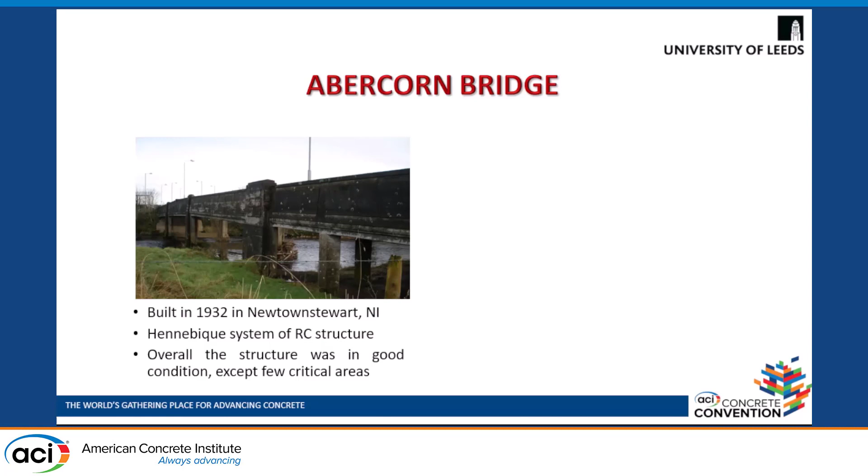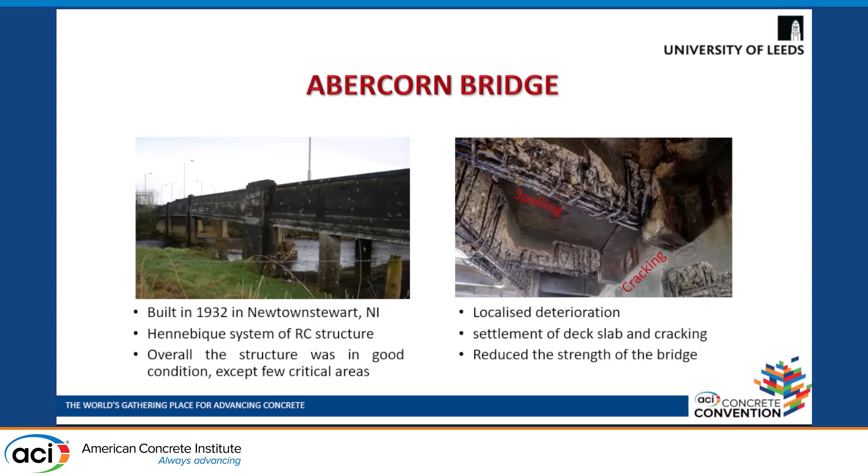A brief overview about the bridge: it was built in 1932 in Northern Ireland using a Hennebique system for reinforced concrete structure. Overall, the structure was in good condition. However, with time, the concrete started showing localized deterioration such as spalling and cracking while exposing the reinforcement steel. In addition, there was settlement of the deck slab and cracking seen across the entire span of the expansion joint, leading to a reduction in the strength of the bridge.

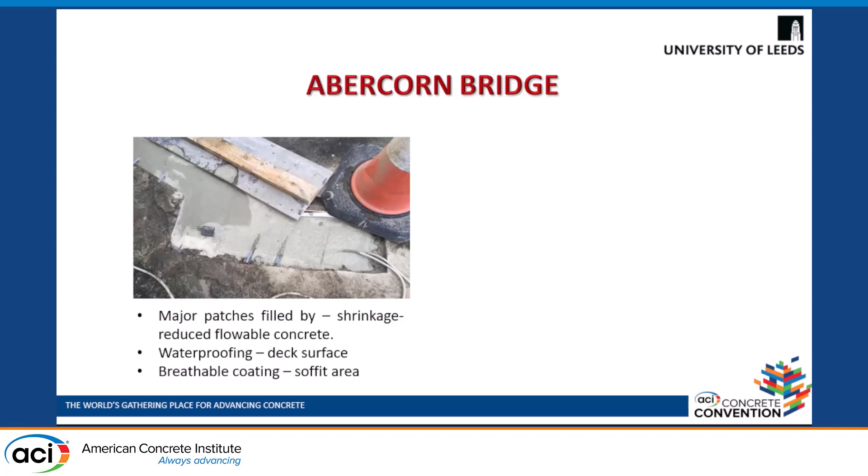Therefore, this bridge was repaired and the major patches were filled with shrinkage-reduced flowable concrete. There was a waterproofing layer over the deck surface, while on all the exposed surfaces there was a water vapor transmissible membrane, which is a breathable coating layer to allow the water moisture to evaporate.

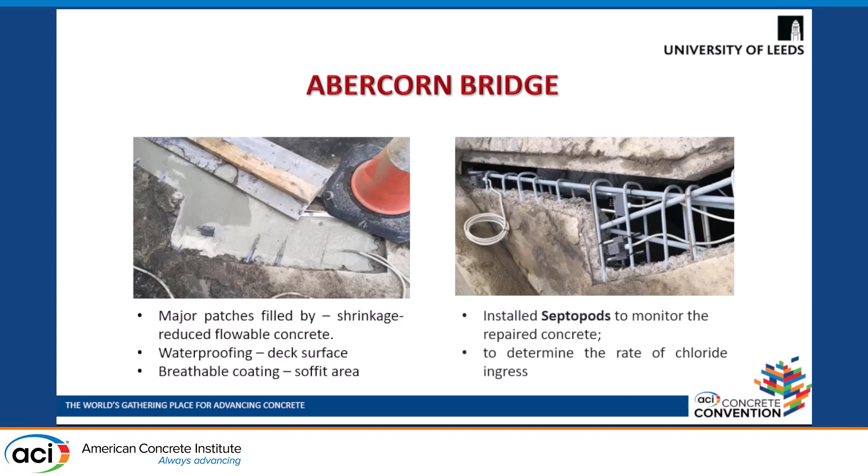During the repairs, 3 Septopods were installed to monitor the repaired concrete and to check whether this repaired concrete is working well or not, and to determine the rate of change of chloride ingress.

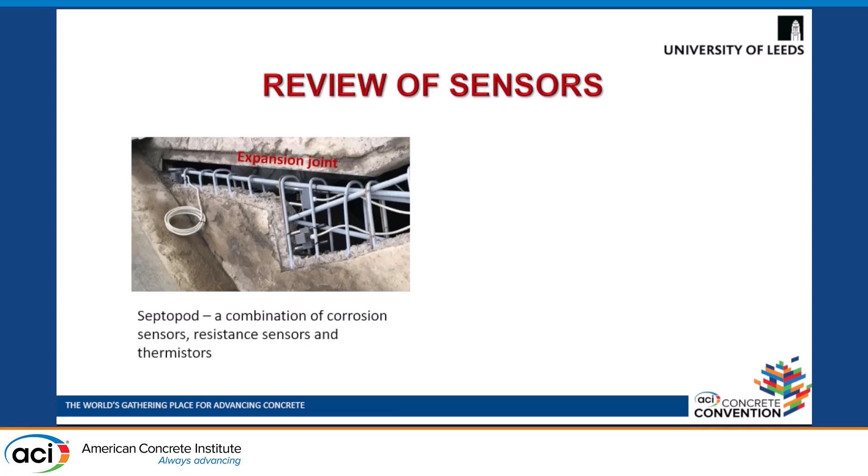So, a review of the sensors: this is the expansion joint where the 3 sensors are installed. These 3 sensors are a combination of corrosion sensors, electrical resistance sensors, and thermistors.

Sensor 1 is located at 20 mm from the deck surface near the expansion joint, while sensor 3, which I'll be discussing here, is located at 20 mm from the soffit area near the expansion joint. Sensor 2 I won't be discussing in this presentation, just these 2 sensors.

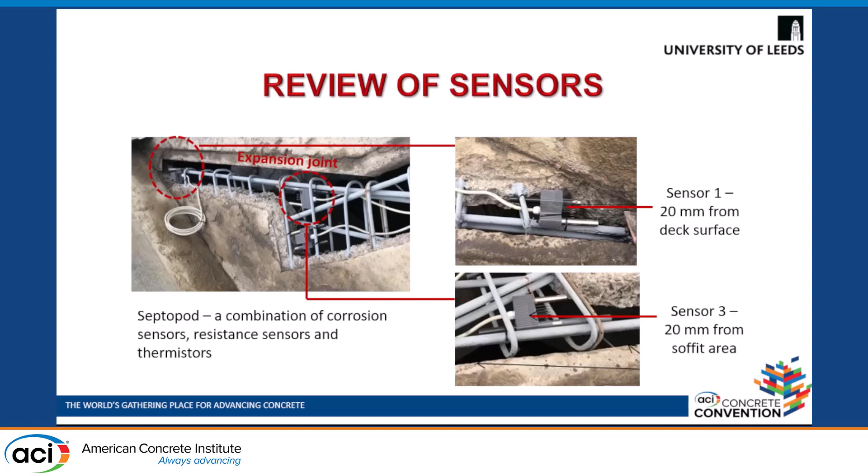These 2 sensors are oriented in such a way as to capture the changes in electrical resistivity and temperature near the deck surface and the soffit of the bridge. The data was recorded over 4 years: every 2 hours for the first 20 months, and thereafter twice a day for the remaining period.

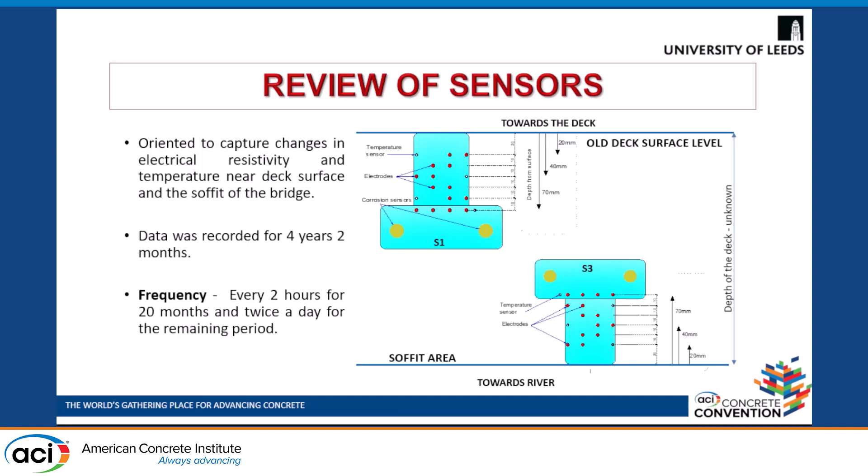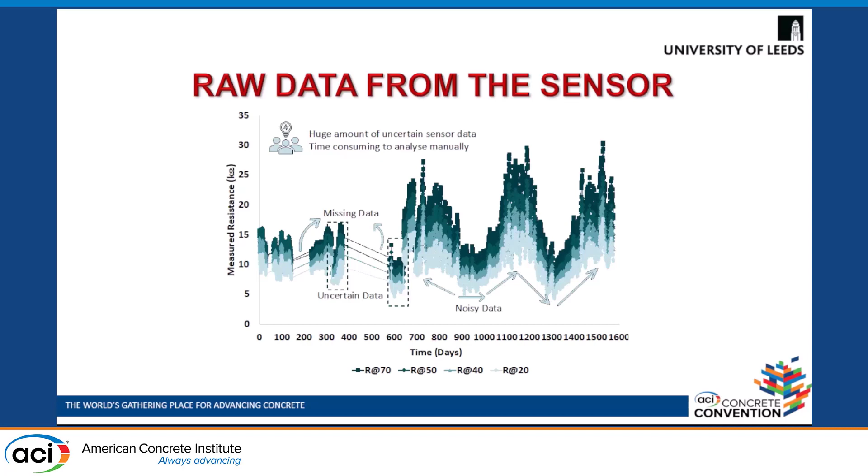With the amount of monitoring being done, the data collected is also accelerating, making it difficult to analyze and manage this huge amount of uncertain sensor data, and it is time consuming as well. Therefore, an automated AI-based SHM methodology has been developed and applied to the data obtained from electrical resistance sensors, to calculate the diffusion coefficient to assess the performance of repaired concrete.

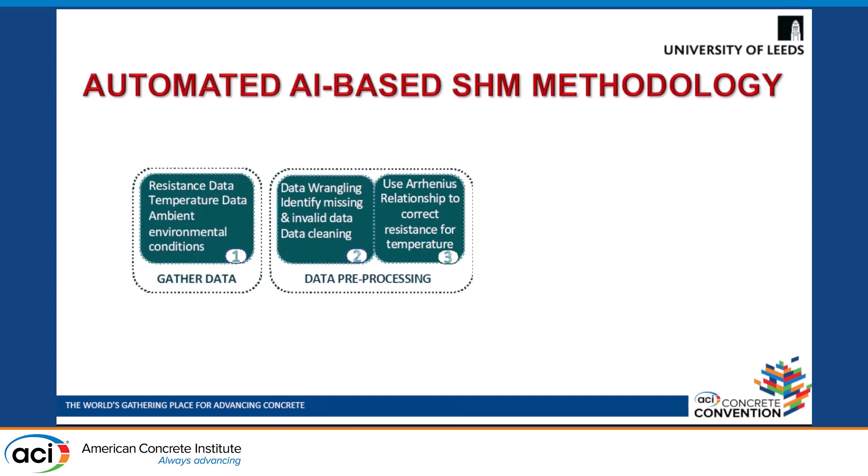This methodology is a 5-step process. In the first step, you gather the data from resistance data, temperature data, and all the ambient environmental conditions data. It is then pre-processed, where you identify the missing information and invalid data, clean it, and use an Arrhenius relationship to correct the resistance for temperature, to understand the effect of temperature and ambient conditions on the resistance measurements.

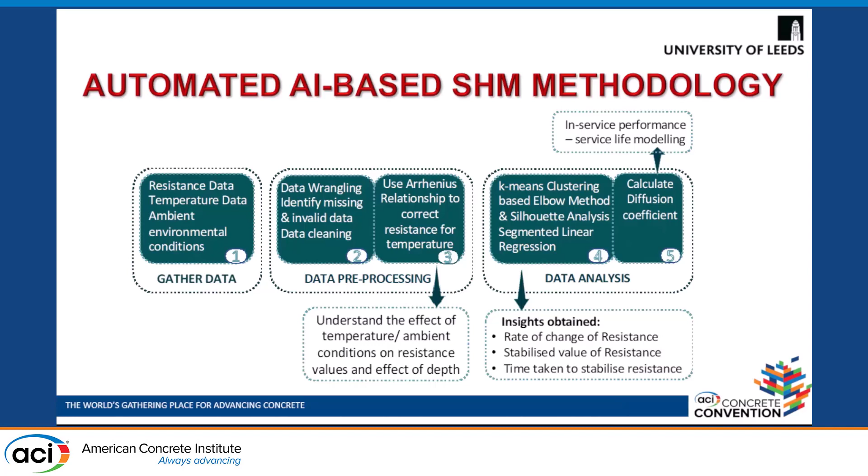Once the data is pre-processed, you use a k-means clustering-based segmented regression, which provides insights on the rate of change of resistance, the stabilized resistance value, and the time taken to stabilize the resistance. This can then be used to calculate diffusion coefficient values, which can in turn be used in service life modeling for in-service performance.

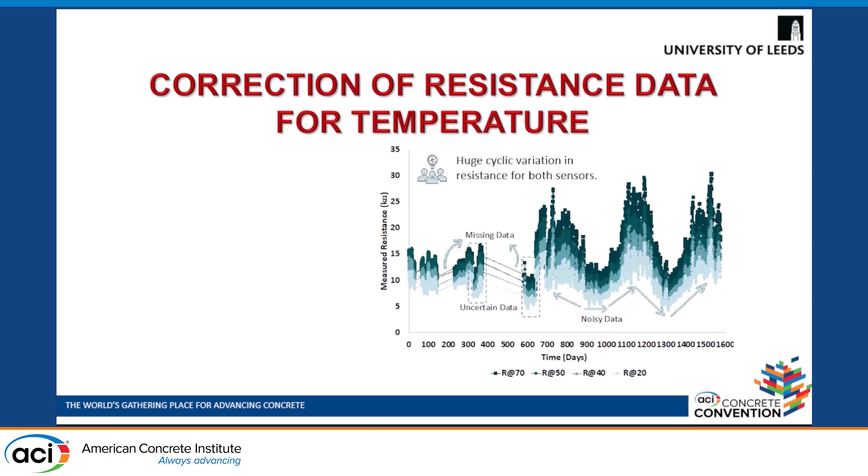As you can see in this raw data, there were huge cyclic variations in resistance for both sensors, mainly because the resistance is affected by temperature measurements. With the increase in temperature, there was a decrease in the resistance. Therefore, this Arrhenius relationship is used to reduce the influence of temperature and standardize the measurements to 25 degrees Celsius.

So these huge variations which were seen earlier... sorry, this is not moving.

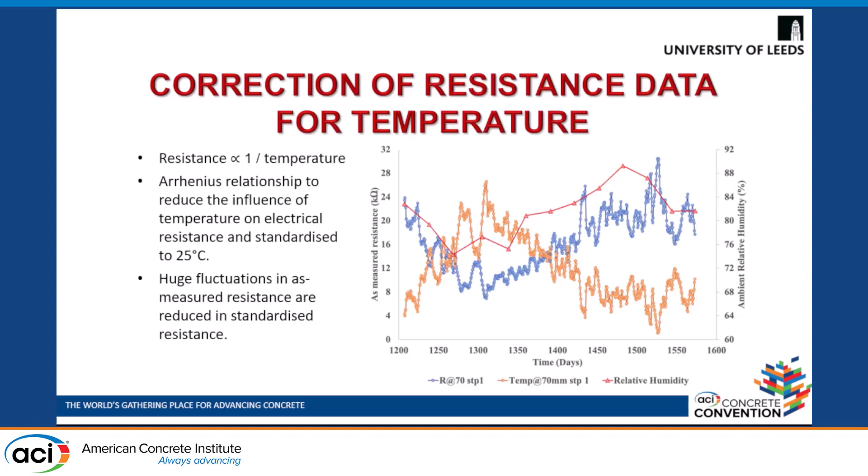The huge variations which were seen earlier are now reduced, and we can see that there is some missing information in the data. Overall, the resistance is increasing with time. However,

there is a drop in resistance around the end of year 1, after the repairs. This was because there was a leak in the repairs. So once these repairs were done again, the resistance started to increase. However, there was

another increase in the resistance, which was around 600 to 700 days in between. This was because there was a change in the frequency of data being captured, and secondly, the nearby areas of the bridge were heated up to get rid of the moisture inside. So that led to an increase in the resistance.

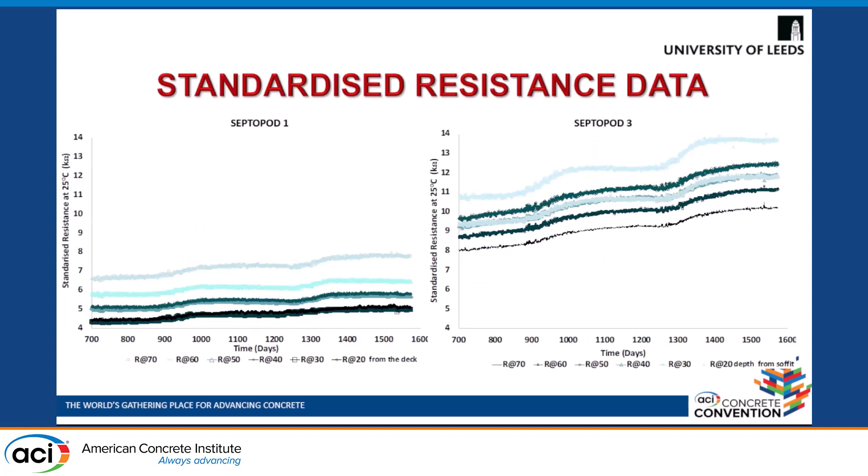However, after 700 days, there was a continuous increase in the resistance. So for further analysis, we are using the data after 700 days.

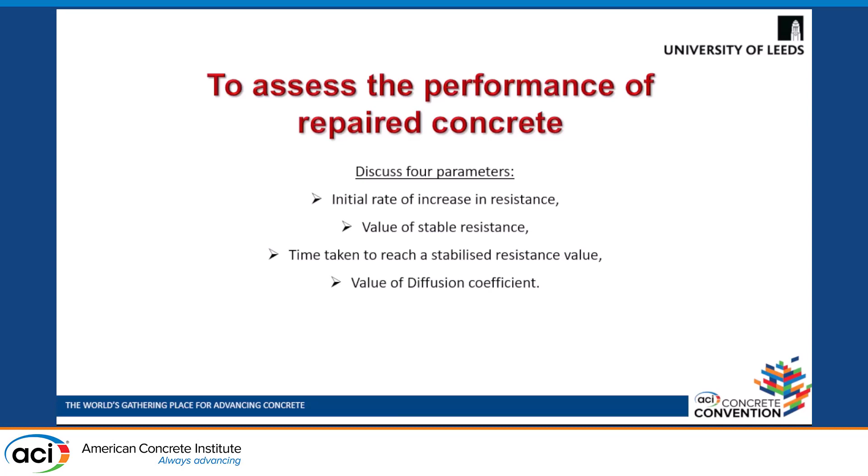So to assess the performance of repaired concrete, it is essential to discuss 4 parameters: initial rate of increase in resistance, value of stabilized resistance, time taken to reach a stabilized resistance value, and value of diffusion coefficient, for which we are using clustering-based segmented regression.

The first step is to use an elbow method, which is based on the k-means clustering algorithm. In this method, different values of k are run in the algorithm, and it identifies the optimal number of clusters using the within sum of squares approach, showing that there are 3 clusters in the data set.

To cross-validate it, we are using silhouette analysis, which identifies how well each data point fits into a certain cluster, and identifies how many optimal clusters there are. So in both cases, we have seen that there are 3 clusters.

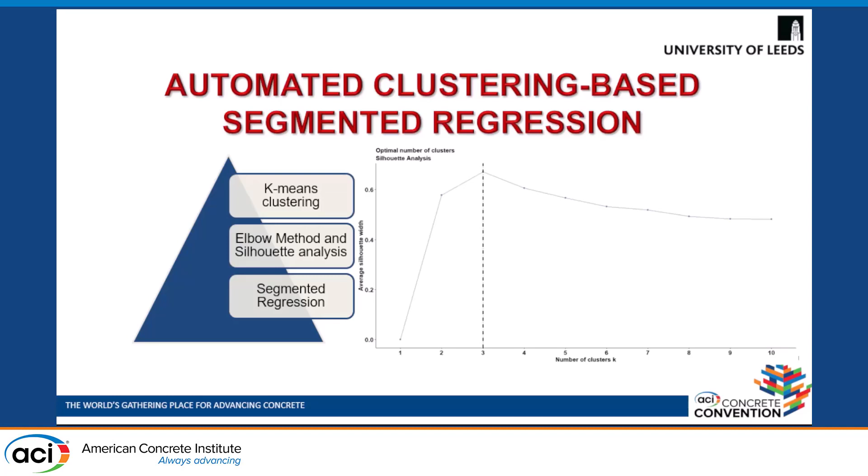So the segmented regression is done on 3 clusters such that it divides the entire data set based on the change in the slope difference. And the final intersection point of the 2 clusters is considered as the time taken to stabilize resistance and the stabilized resistance value, while the 3 segments in each cluster show the rate of change in the resistance.

And it can be seen from the 3 regression values that in the final regression, the values are almost stabilized.

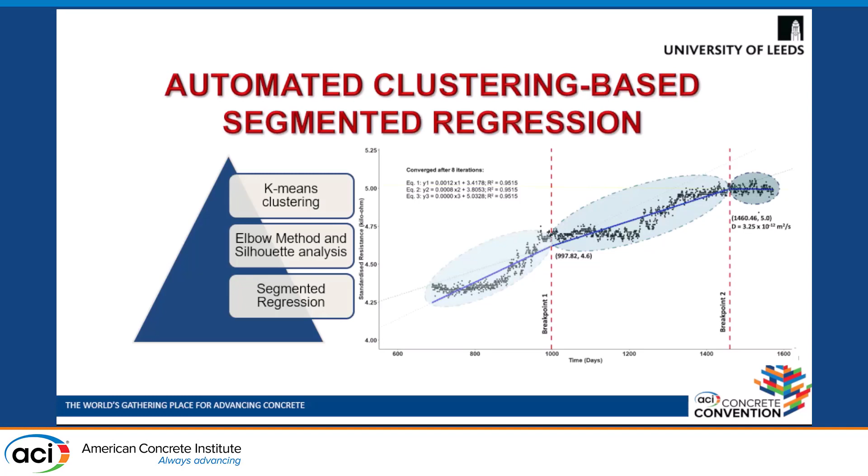This approach was used on all depths for both sensors, and the insights obtained show that the resistance was continuously increasing. However, there was a slow increase near the depth of the deck surface, while there was a faster rate of change near the soffit area because of the maximum evaporation happening there due to the presence of breathable coating at the soffit. Secondly, it took more time to stabilize near the soffit, and it took almost the same time to stabilize near the deck surface at both locations.

The resistance values obtained also show that the value of stabilized resistance is lowest at 20 mm from the deck surface, and it is increasing towards 70 mm from the deck surface, while it is highest at 20 mm from the soffit area. This is because of the surface releasing more moisture due to the presence of breathable coating on the soffit area, while the deck surface has a waterproofing layer, leading to lower resistance value.

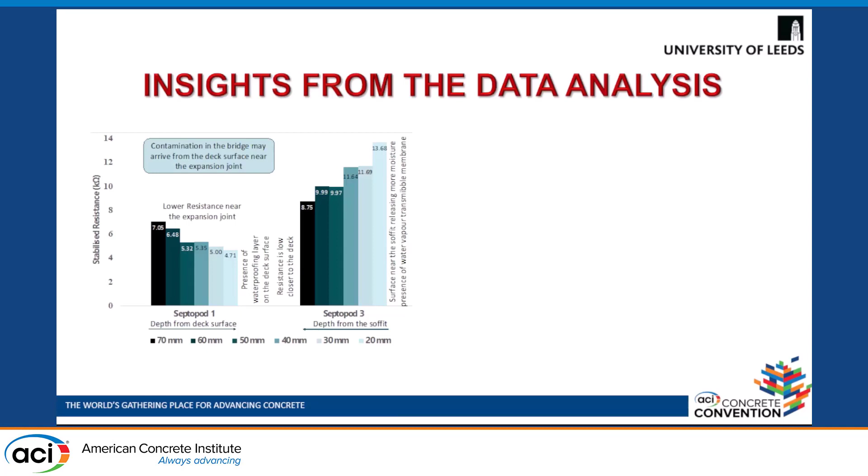Therefore, these obtained values of stabilized resistance can now be used in the equation D by D-naught equals rho by rho-bulk, which is used to calculate the diffusion coefficient, which can be used further for predicting the service life. The values obtained for diffusion coefficient lie in the range of 1 to 3 into 10 raised to power minus 12, implying that the repaired concrete is performing well.

However, if contamination were to arrive, it may arrive in the bridge from the deck surface near the expansion joint, because this sensor location has a higher diffusion coefficient value.

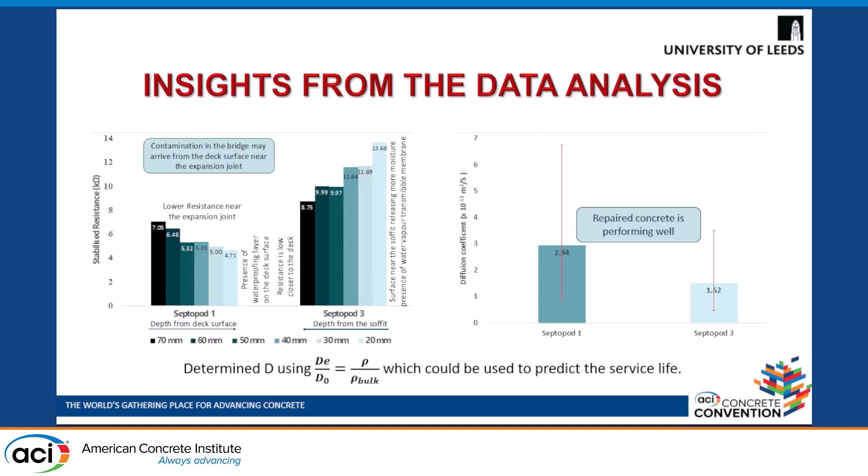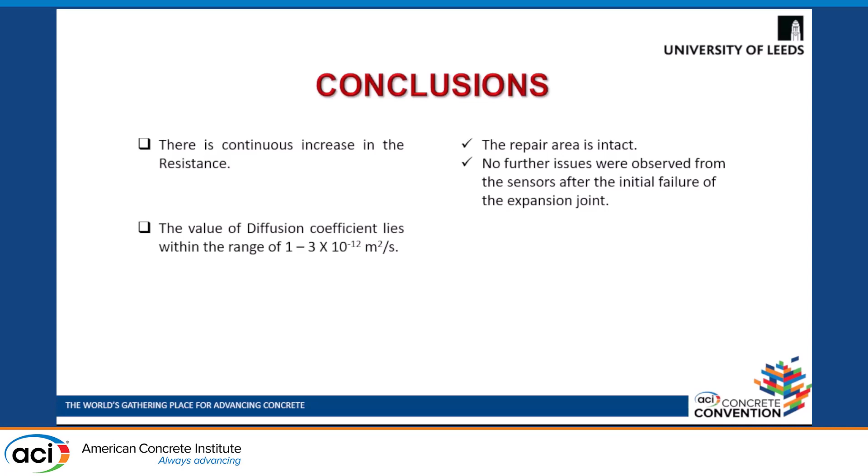So finally, we can conclude that there is a continuous increase in resistance, implying that the repair area is still intact. There are no further issues observed from the sensors after the initial failure of the expansion joint. The values of diffusion coefficient lie in the range of 1 to 3 into 10 raised to power minus 12, so the performance of the concrete lies within the range of good quality concrete, implying the repaired concrete is performing well and demonstrating the property to slow the corrosion process.

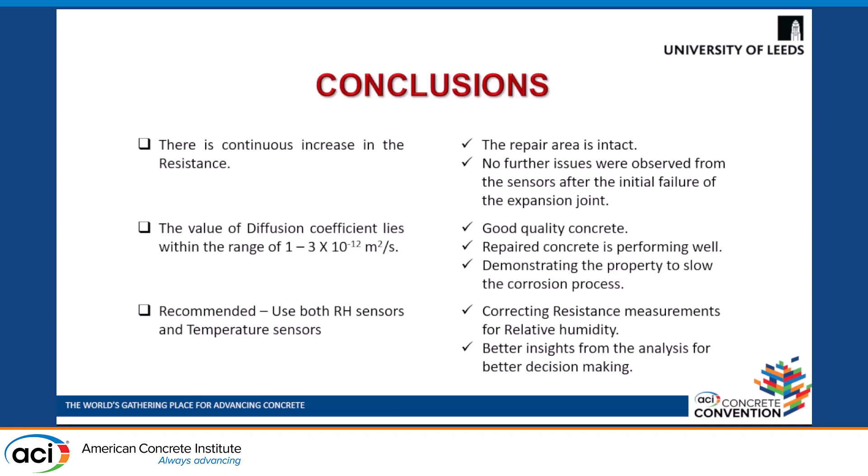Finally, it is recommended to use both relative humidity sensors and temperature sensors inside and outside the concrete to correct the resistance temperature measurements for relative humidity, and to get better insights from the analysis for better decision making.